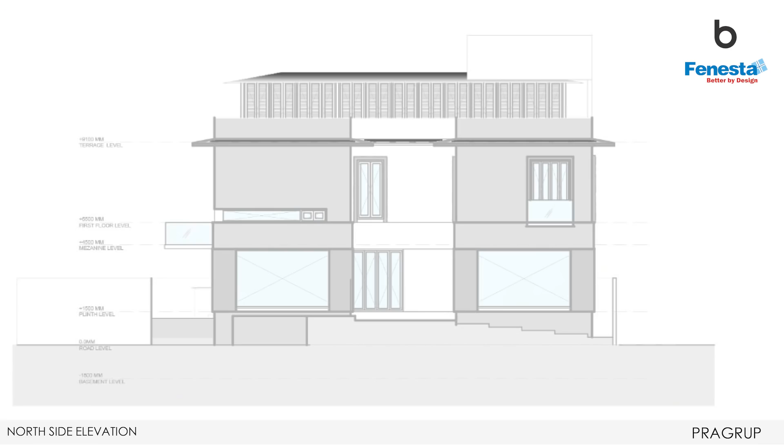If you look at the site, it's primarily a very wide sort of rectangular configuration, and it had a very good facing to the primary street. It did not have a very wide footpath, and if you look at the buildings in proximity, it was not the best context you would ever want to look around. It's also a very dense kind of population that you see all around.

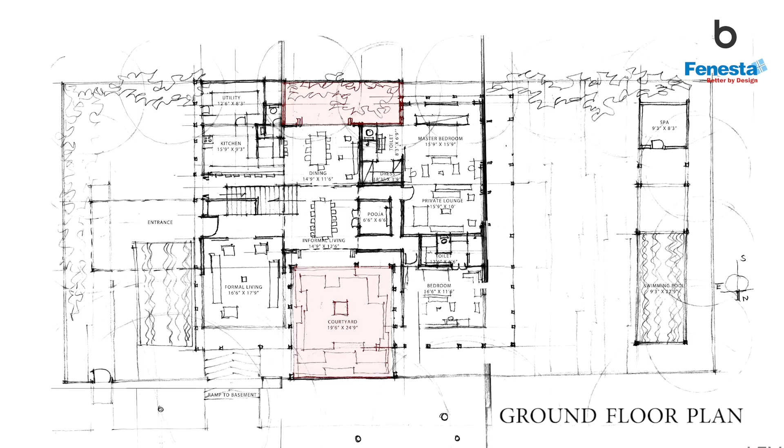But for us, what was important was to build the house in such a way that we could create an introverted environment and make the whole house read primarily as a large courtyard space looking inward, another primary court inward, so that this as a green space and this as a green space would act as a great connect of the visual requisite.

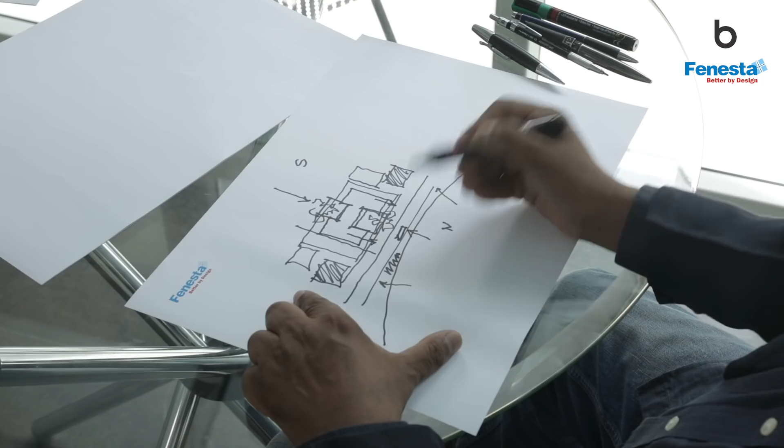It was primarily a north-facing site, so the whole aspect of visual connect for us, in terms of broad daylight, was fantastic to be all taken in from the north surface. But nevertheless, the traffic was very intense, so it was important for us to make sure that the house had to be sealed in terms of sound insulation.

But at the same time, the garden that we could get could be nice there. So in terms of the statutory setbacks, whatever we got, we could manage to capture the best that was created as a sort of micro environment.

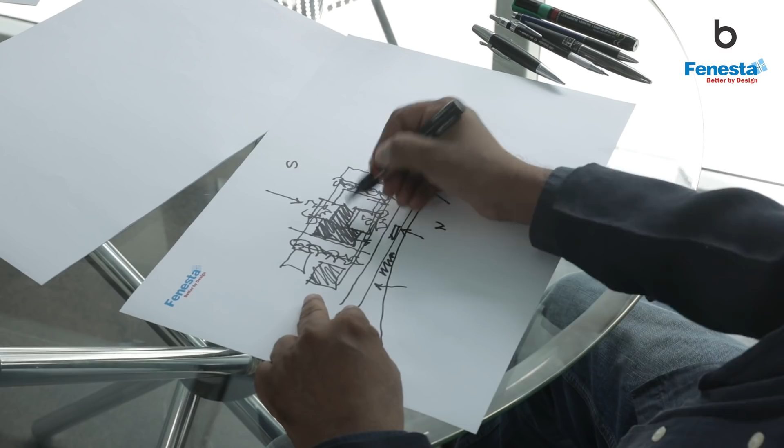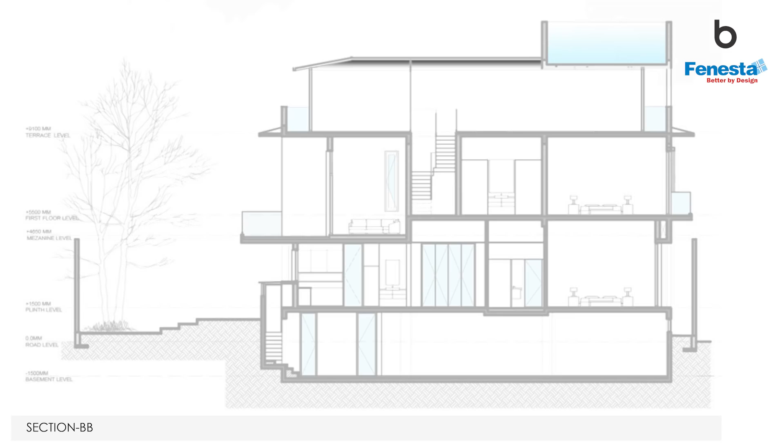One aspect of the whole house was the section. I think for us in making any home, the section, the sort of experience of the house, becomes very, very important. From the landscape, you arrive into the porch space, and then you are in the entrance vestibule, and the vestibule extends with a bit of the court space and the temple precinct, and then the bedroom.

Now within this whole sort of arrival zone, when you look at it, we had one which was the mezzanine library, then it's connected to another level of the mezzanine library, and then the bridge connect around the central spine of the puja, and then the bedroom connections, and then the main connections of the other bedroom.

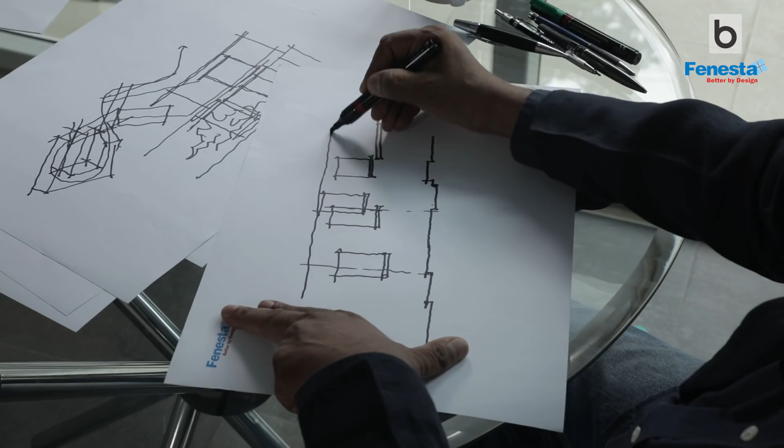So this space acts as one particular vestibule connect. This space acts as another vestibule connect, and the walkway spaces act as another vestibule connect. And all this is housed with one large sort of vertical, horizontal slab with a skylight sitting there. And this is again landscaped on top.

So this slab and this slab articulated make these particular aspects of the house sort of very, very haptic. So for us, making the house is not just about the horizontal or the three-dimensional visual experience of the space, but how does the section work?

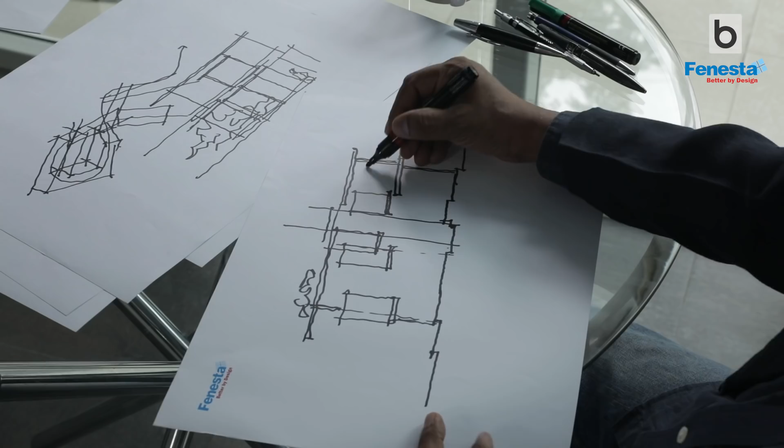How does it help air to move? A lot of invisible things, such as how does the light come as an extra added wedge line as a shelf? How does it make the room spaces absolutely vibrant and bright? That matters. And the spaces that we have as volumes, the visual connect of the people, what they see as they stand, as they walk, or as they move, becomes also very, very important.

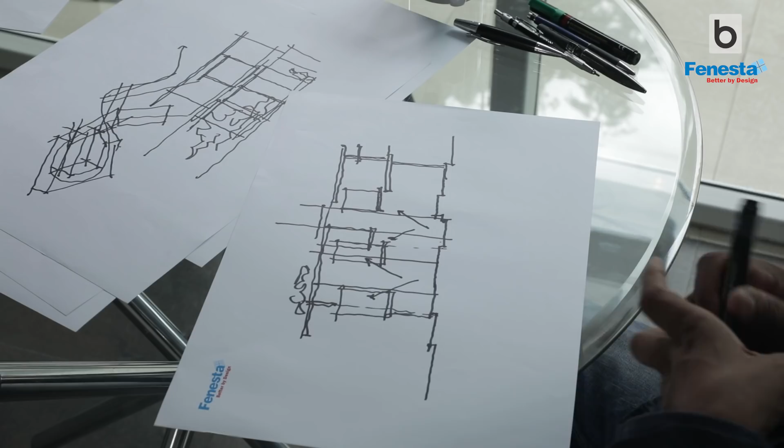If you look at the primary requisites of the house, there was one which was a kind of public space, an arena where they would meet people. And then there would be the other, which is a very private space where the master suites are. And then there is the puja or their religious requisite space. So it was a sort of montage of many spaces.

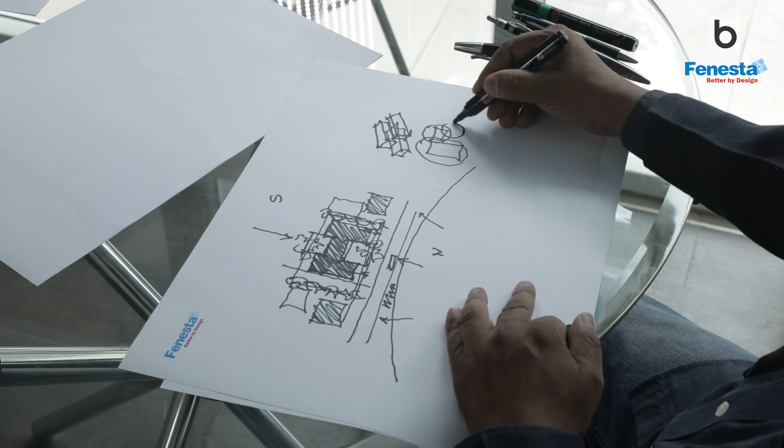So for us, in terms of how we could orient the house, it was to make it sort of semi-private and private and sort of religious and the bed space. So this culmination helped to make the house.

In a way, when you look at the geometry of the house, the courtyard that we sort of integrated in between could make us understand the requisite of how these spaces got integrated, cross-functionally. I think that was very, very important. It was a simple montage of a few vertical and few horizontal sort of weave that helped these three programs sit together.

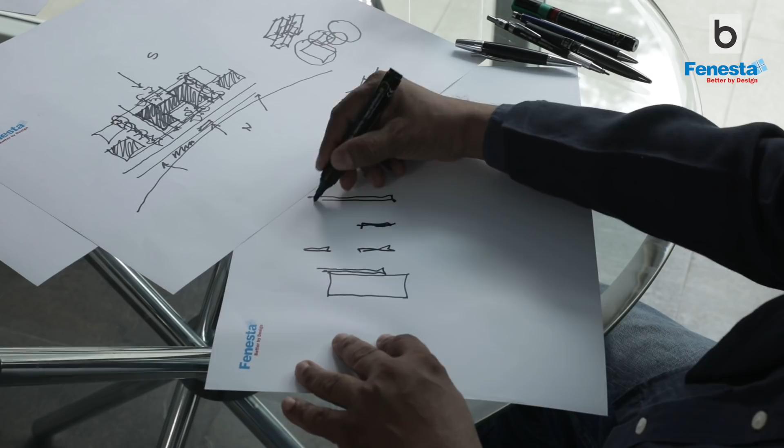At ground level, the garden was the primary axis of arrival. After that, there were a series of screen walls that helped the plan format itself into the house geometry, creating the kitchen space, the living space, the primary staircase and arrival experience, an atrium space where the puja was primarily located, and a residue space leading to the big courtyard facing the northern edge line.

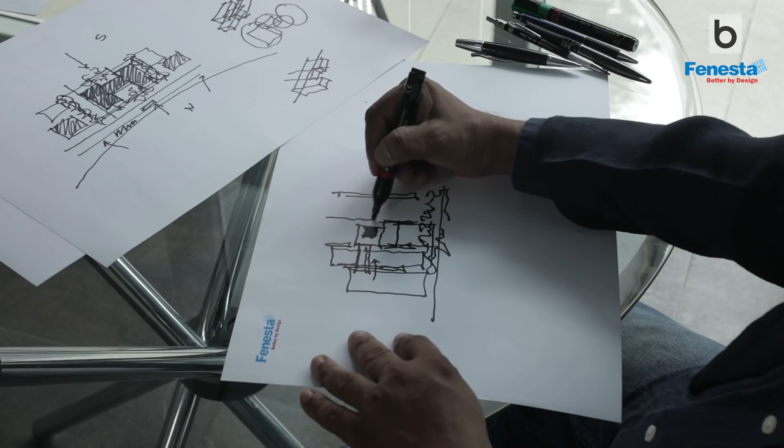This had a lot of garden and park space available, plus the long rectangle that added to form the master suite, with a cluster of toilets, and the dining court. These walls in between articulated how the alignment of various activities should work.

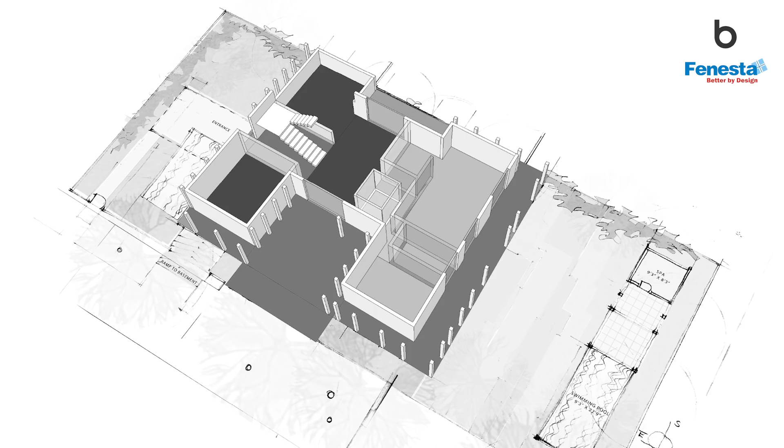Looking at the matrix of the whole plan as a large rectangle with courtyards, these wall alignments helped us articulate the transitions of various layers of arriving into the house as a labyrinth. It was important not to make it very linear, as that would destroy the sequencing. There must be a sort of wedge line where you arrive and are surprised, arrive and are surprised. That play is fun for the house.

Some of the oblique elements, such as the staircases or various levels you can articulate to arrive into the volume of the house, helped us make the architecture of the inside space a little more iconic.

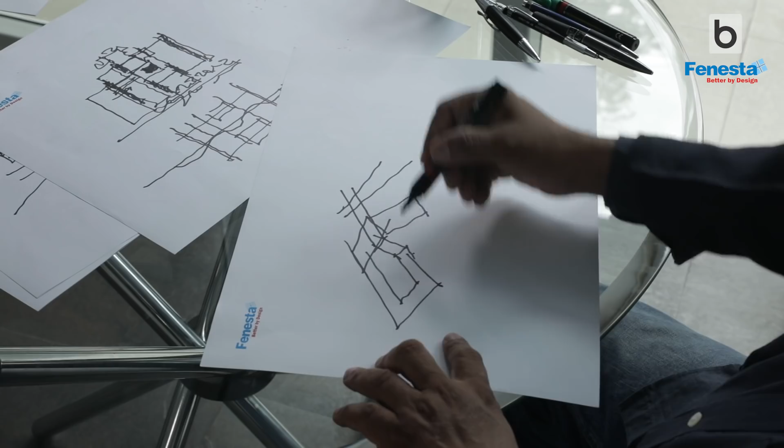The whole staircase acted as a primary link to the arrival space, went back and connected into the living room space as a bridge connect, and then there was another connect for the staircase to arrive back and turn around. This whole volume became a kind of library vestibule around the living room area.

This act of moving around the house helped people articulate and understand the atrium space of the living area, the two bedrooms on top, the one bedroom on the ground, and the guest space, all connected not just by a direct vestibule space but more by a circumambulatory idea within the house.

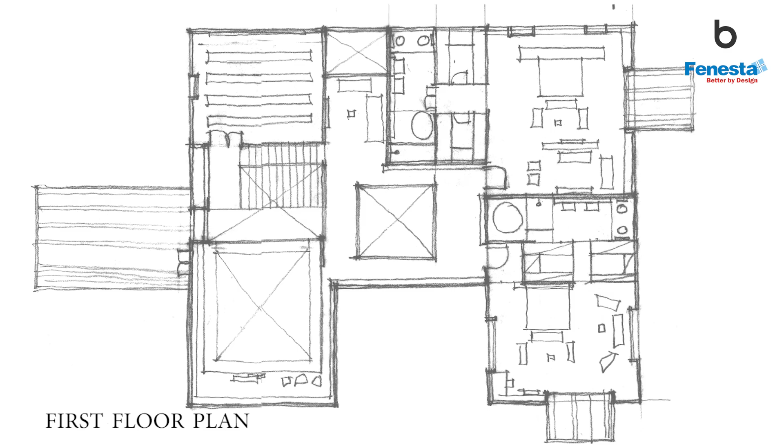The material was primarily large pieces of rock, in the way that when you go to any village settlement around Bangalore's outskirts, you see large stone slabs stacked one next to the other. It's a bit rugged and forms a very nice pattern as a wall.

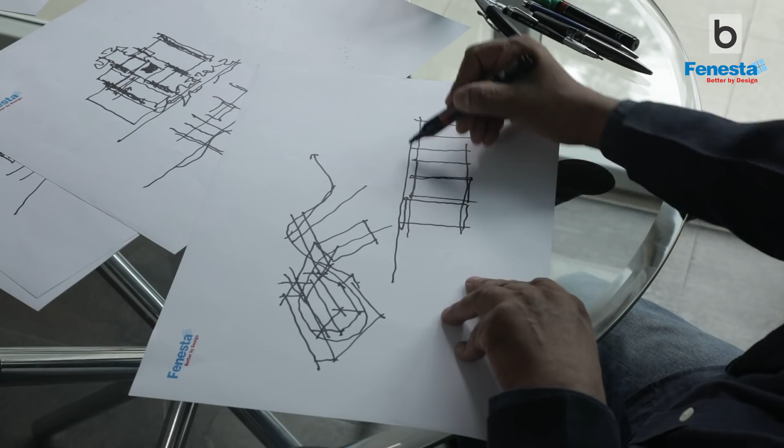We looked at this old village wall and reconnected back to make the gate and main part of the house, then aligned certain horizontal elements and made very accurately crafted timber windows along a large white wall patch.

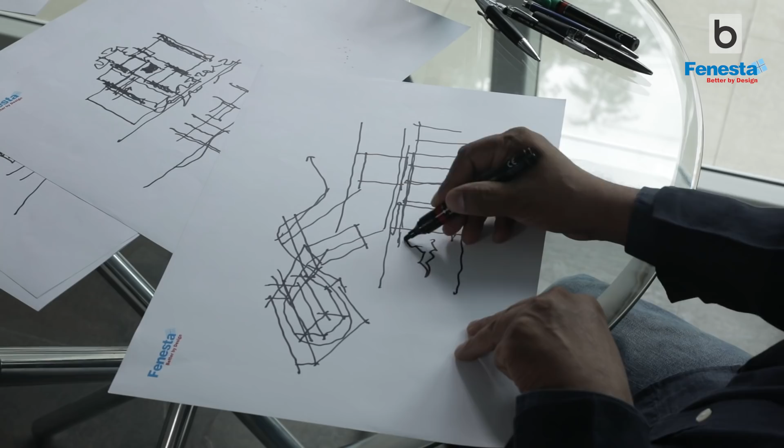So in the composition, the base was very vernacular, so that when you look at the facade vestibule element, taking one particular module, the base was almost as though you would walk on the edge of a village wall.

But when you turn around and look at the window patterns, the window cubicles that elevate themselves as projected spaces out of the white wall area, it acts as that urban setting with picturesque pop-outs to the street.

Very important also are the invisible spaces, such as how do you deal with water, how do you do a small STP, how do you recycle the water and maximize its reuse content, and how do you regenerate the landscape on the terrace?

There was one large lower ground that took care of the whole activity spine with a large stormwater tank housed within the space. This also took care of the parking spaces and a good terrace landscape, programmed back from recycled water content, helping create a super big garden with a large study and party hall.

This arena space extended towards the terrace line not only insulated a lot of heat ingress into the house, but thermally contained it, so that the green aspect of the house was the service engineering, which was all passive.

How do you make the house architecture, with its materiality plus the way you articulate the spaces, accurate to the weather, responding to the sun, the rain, and water intelligently? That makes the house super nice.